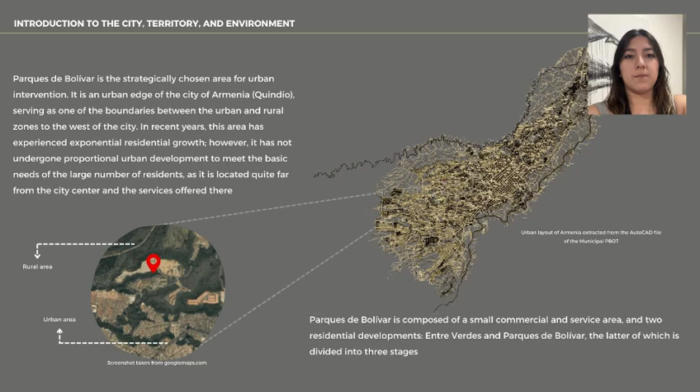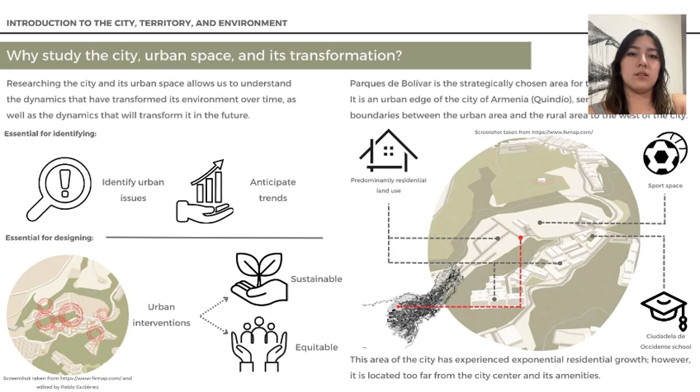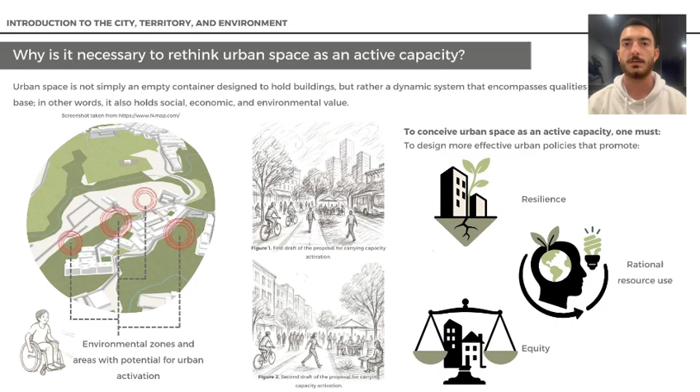Through our site analysis, we found that most of the space is occupied by housing, with no real network of public spaces, and also remains disconnected from the rest of the city. There are small commercial areas and abandoned sport fields and a school, but these don't meet the needs of over 3,400 people living there. The area also faces social challenges like insecurity in the neighboring communes area and unplanned road connections that increase risks and isolation. It lacks public facilities, pedestrian pathways, green spaces, and essential services, making it a fragmented and underserved community.

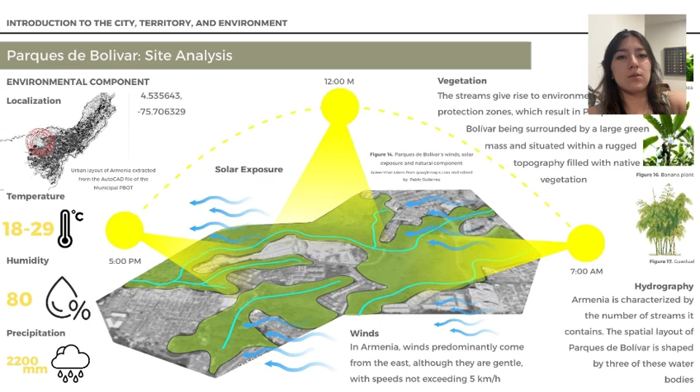What's also important is the environmental potential of the area. Even though there are no public green spaces, almost half of the territory is covered by vegetation, including protected zones shaped by natural streams. These areas could support new ecological corridors, urban gardens, and shaded meeting spots. This reinforces the idea that the landscape itself can become a tool for resilience if we plan around it smartly.

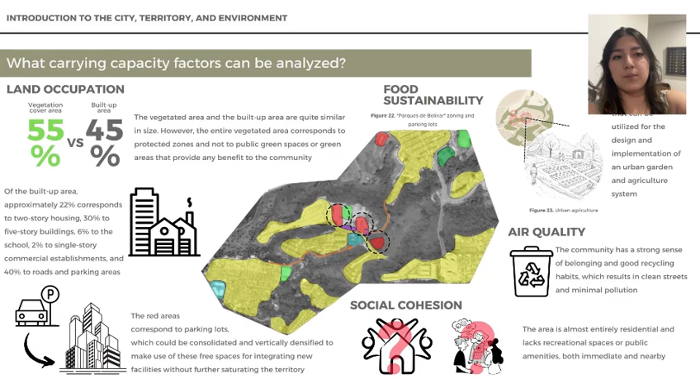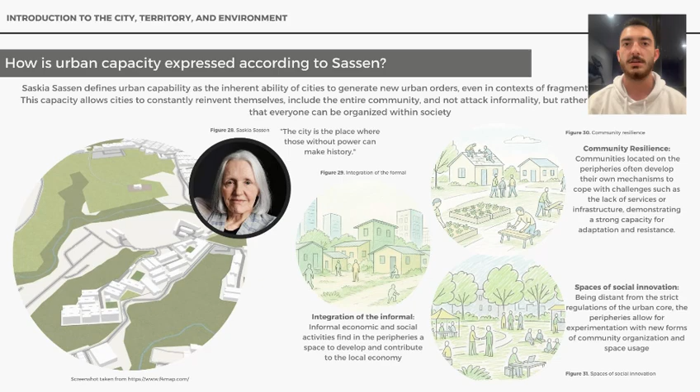We used concepts from Saskia Sassen, who talks about cities as places with the capacity to reinvent themselves, even in a context of inequality. Also, the smart city model helped us understand how to make Parques de Bolívar more livable through technology, sustainability, and most importantly, citizen participation.

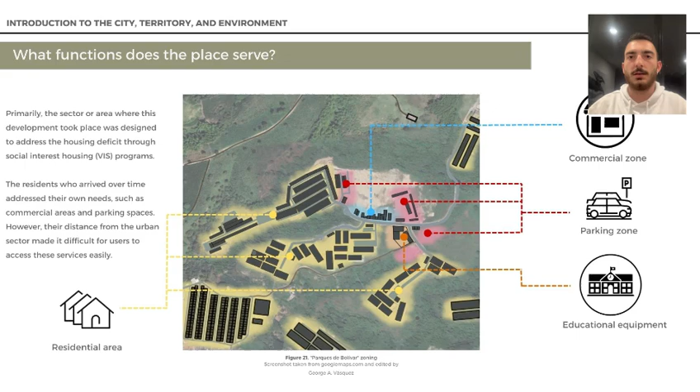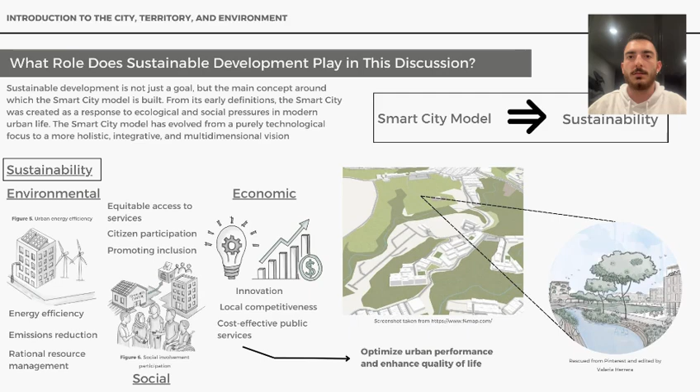Now, in modern urban planning, cities are not just made of buildings, they need to be living systems. In order to accomplish this, they need to be sustainable, inclusive, and resilient. We must rethink urban space as an active capacity, one that balances environmental, social, and economic needs.

We also see opportunities like a strong sense of community, good recycling habits, and a unified green zone that can be improved in a better way.

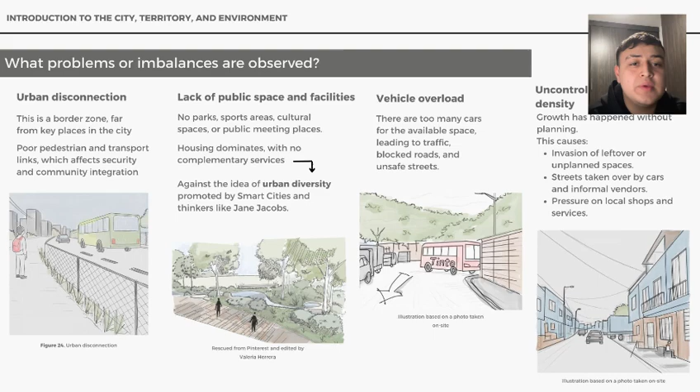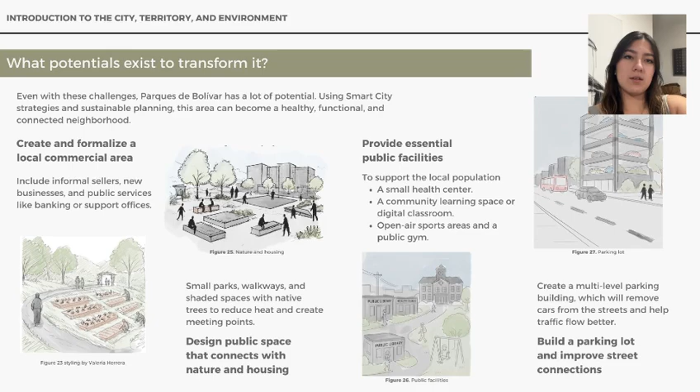Now, our proposal for this area focuses on four main strategies. The first one is revitalizing the commercial area into an open-air urban mall that integrates informal vendors and small businesses.

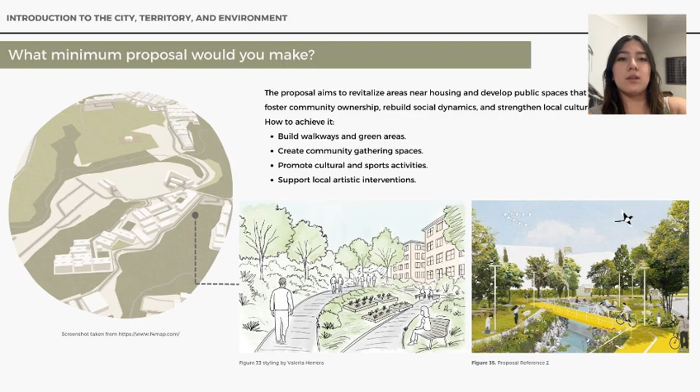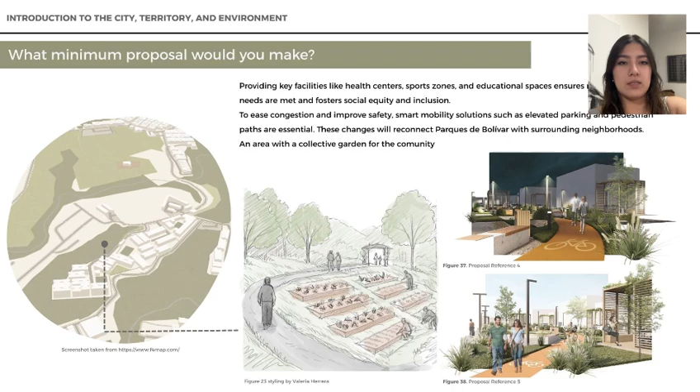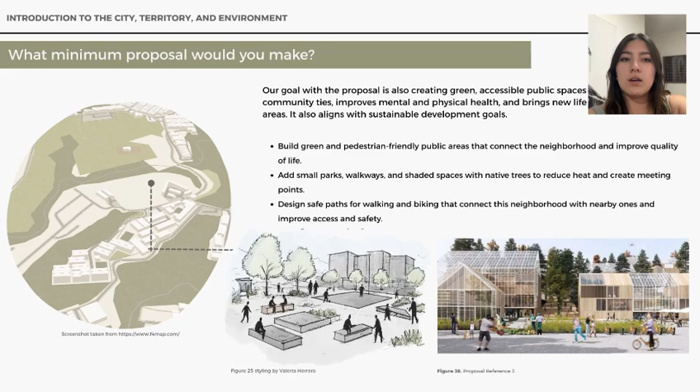Second one is creating public spaces like parks, walkways, and green areas with native trees that connect housing and nature. The third one is providing essential services including a health center, a community classroom, and sports spaces. And the last one is improving mobility by building a multi-level parking structure and designing safe pedestrian and bike paths that link Parques de Bolívar with nearby neighborhoods.

All these changes aim to foster cohesion, inclusion, and safety. This way, it could turn Parques de Bolívar into a truly livable neighborhood.

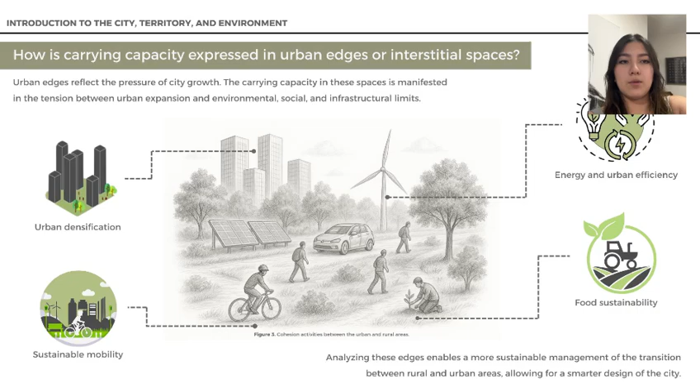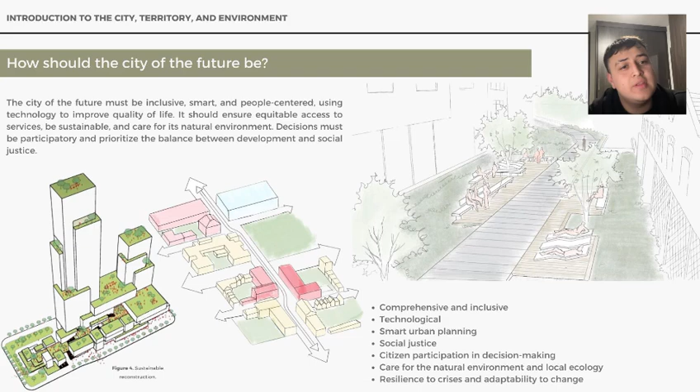In the smart cities model, citizens are not passive, they are creators. Their active involvement through digital platforms, local collaboration, and open innovation is vital to sustainable urban transformation.

In conclusion, urban space is not just about buildings, it's about people, relationships, and possibilities. By applying sustainable and inclusive smart cities principles, Parques de Bolívar can transform from a fragmented edge into a vibrant and connected part of Armenia.